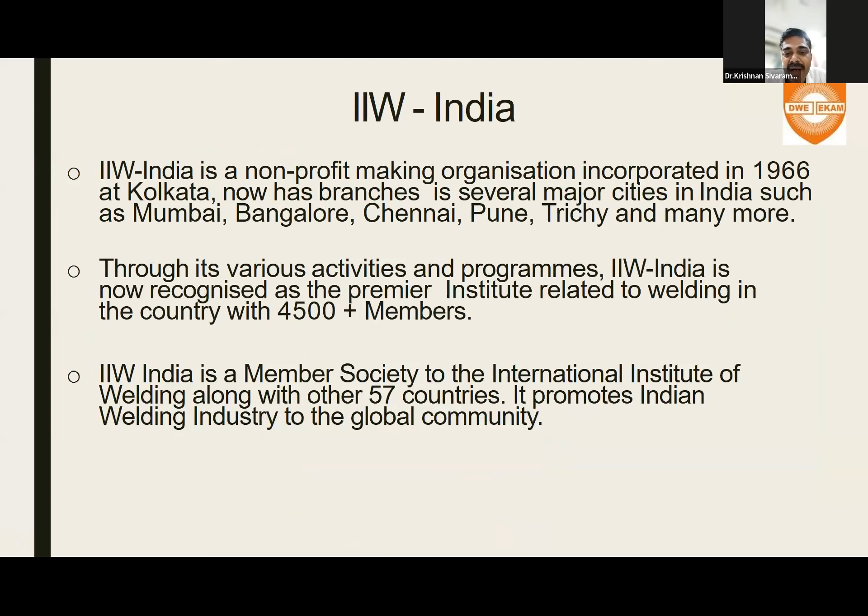So the basic objective is to assist human resource development in welding in India, and to foster R&D in welding, the technology diffusion to industry and the individuals. So a lot of activities are being done to promote health and safety in welding, and we also ensure that international standards of quality are being deployed in the Indian fabrication industry.

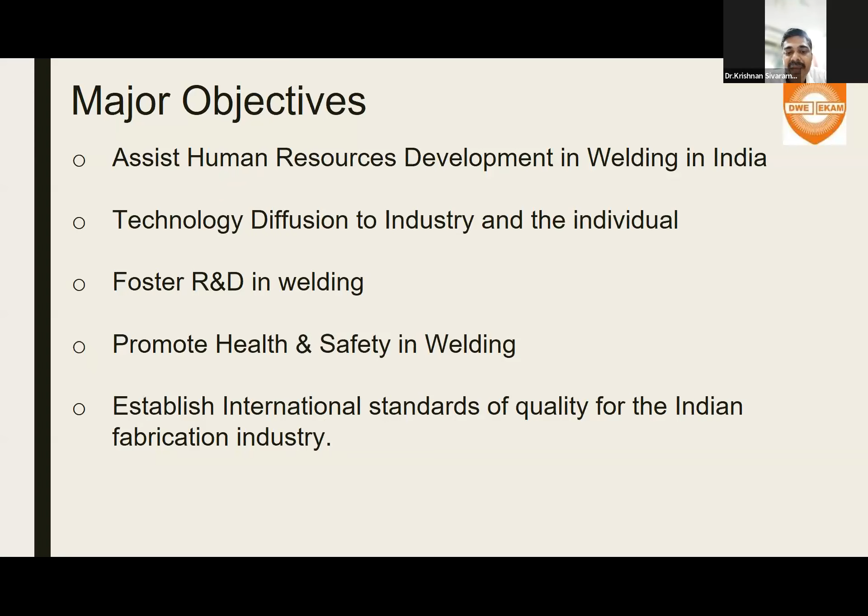So we at IIW conduct a lot of technical meetings, workshops, industry-oriented training programs at various branch levels. So as far as Mumbai branch is concerned, we conduct a lot of workshops, and this Weld Tech Talk is a perfect example where we get speakers all across the globe, and even the participants are from various countries. We get participants from almost 25 to 30 countries to attend this.

And we also run a lot of refresher courses related to welding and quality. And the IIW also publishes the Indian Welding Journal, which is done quarterly in collaboration with the American Welding Society. Next image.

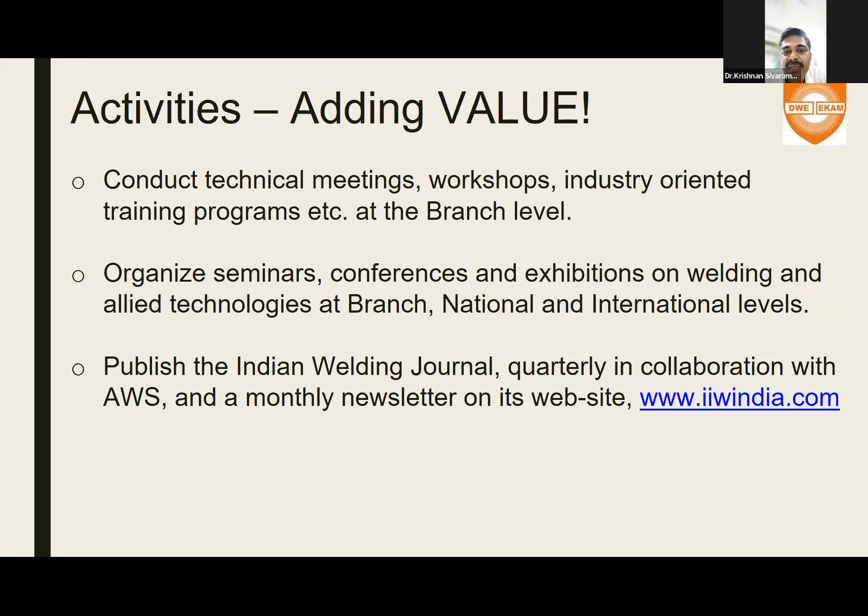IIW also does a lot of welding certifications under ANB for examination and qualification of welding personnel like International Welding Engineer, welding technologist, International Welding Specialist, welding practitioner. And those who are interested can be in touch with us so that we can guide you to the right person at the head office.

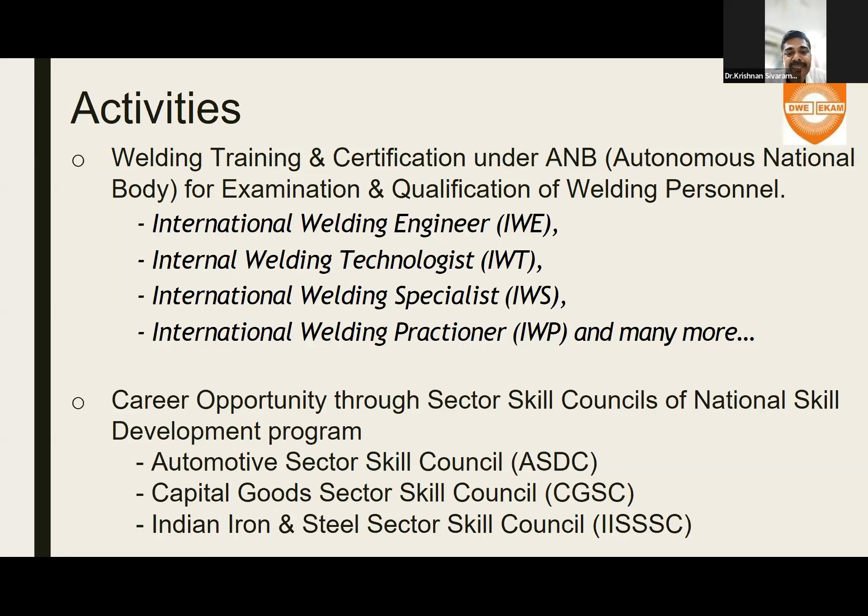And we also have association with various national skill development authorities and programs like Automotive Sector Skill Council, Capital Goods Sector Council, Indian Iron and Steel Sector Council. So as I already told, we have the Indian Welding Journal, and we conduct a lot of branch and national level technical programs and seminars. So in January, we are going to have an International Welding Conference. This time it is being done in Bangalore, along with IMTEX, with an exhibition.

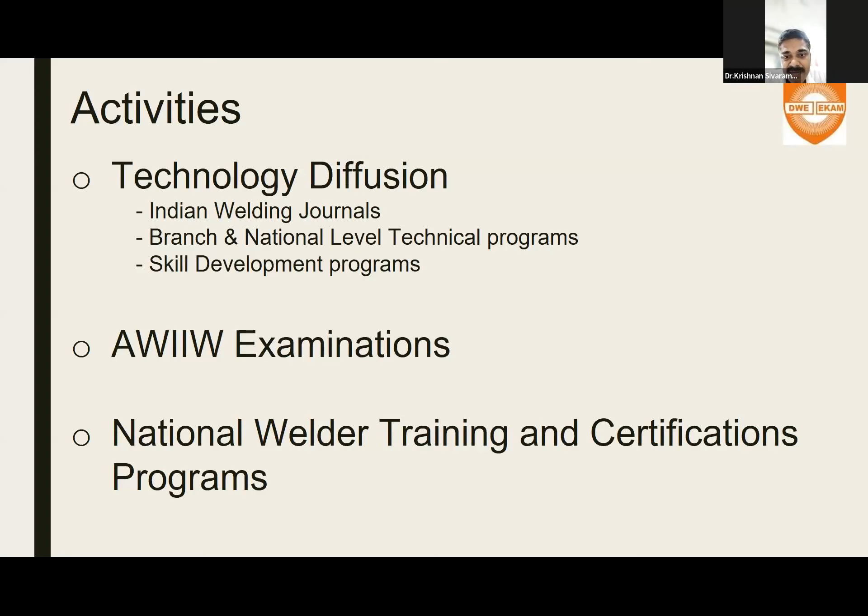And at the branch level, in November, we are going to have a competition for the best welders. And IIW also conducts at national level the best welding engineer competition, which will be rolled out soon. So we request all of you who are interested to participate.

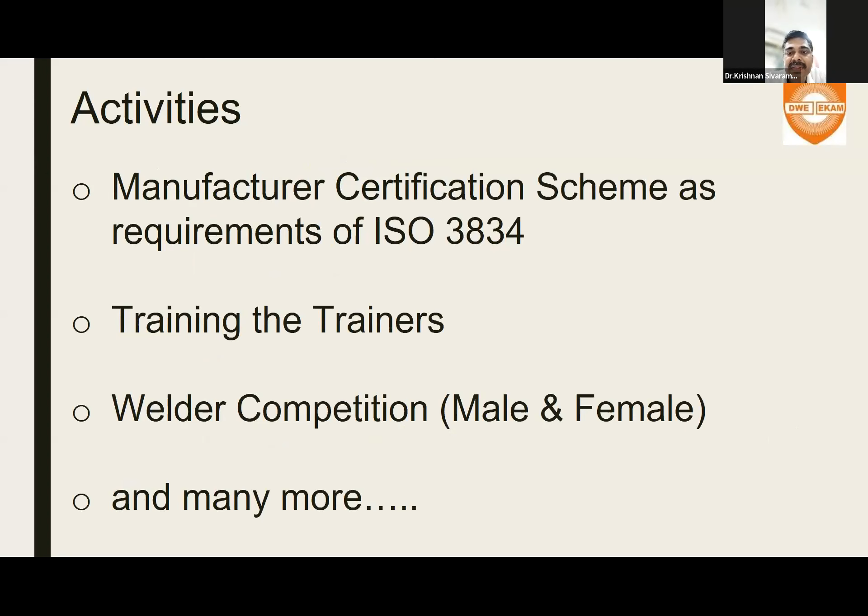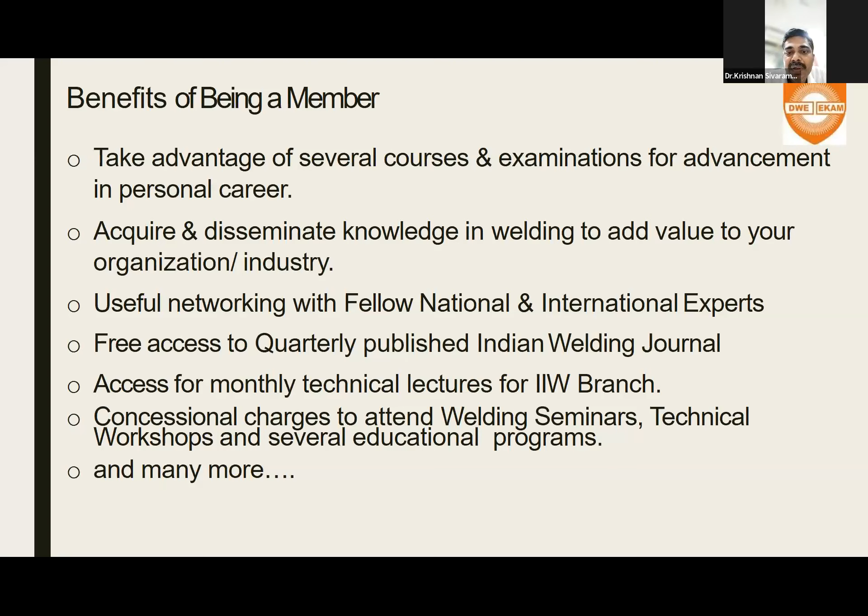So all of you who are not members are welcome. You can be a member of the IIW. There are certain criteria, and the membership has been made online now. So being a member, you have a lot of advantages; you can be part of all these initiatives which IIW is offering. We have a variety of memberships like associate member, associate professional member, and even student membership is available, and you can even be a life member. So those who are interested, please be in touch with us.

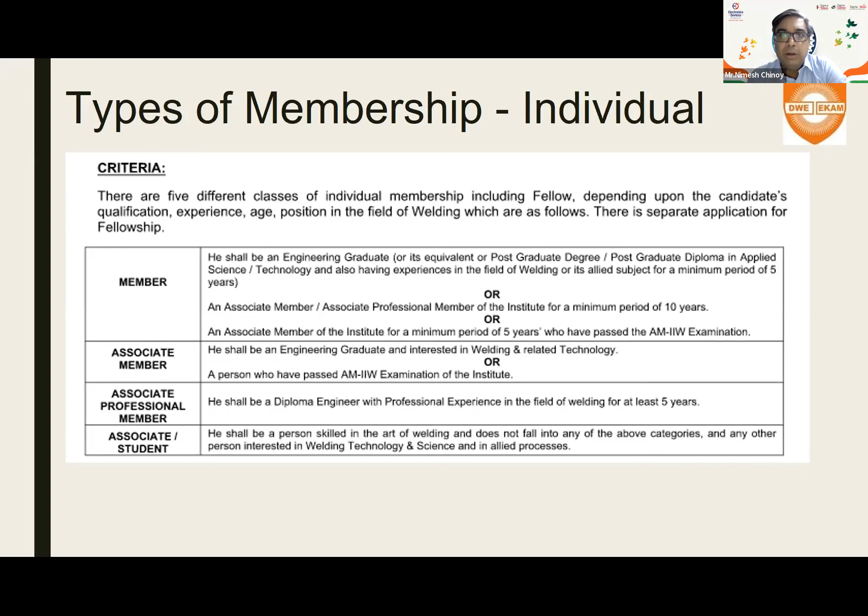Also, just to highlight, if you come from a university or an institute, you can connect with us for a student chapter where your students can take advantage of many of these programs on welding awareness. And we do a one-to-one connect, and we also explore industrial exhibitions and things like that for them, where the students can go to industries, see what the work is that a welding engineer or a welder does, and they get a lot of exposure. So if you are part of an institute or a university, please get in touch with us to start a student chapter within your institute.

So these are details of the various membership fees. The membership is quite light, and I believe it is now online. So you can go to the IIW India webpage and fill up the form there itself. And we really do encourage people to become part of and support this initiative.

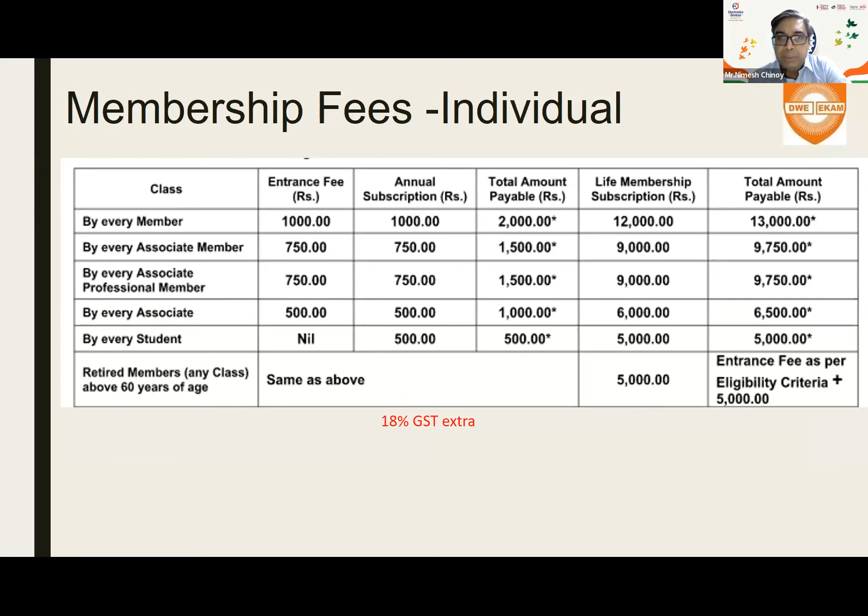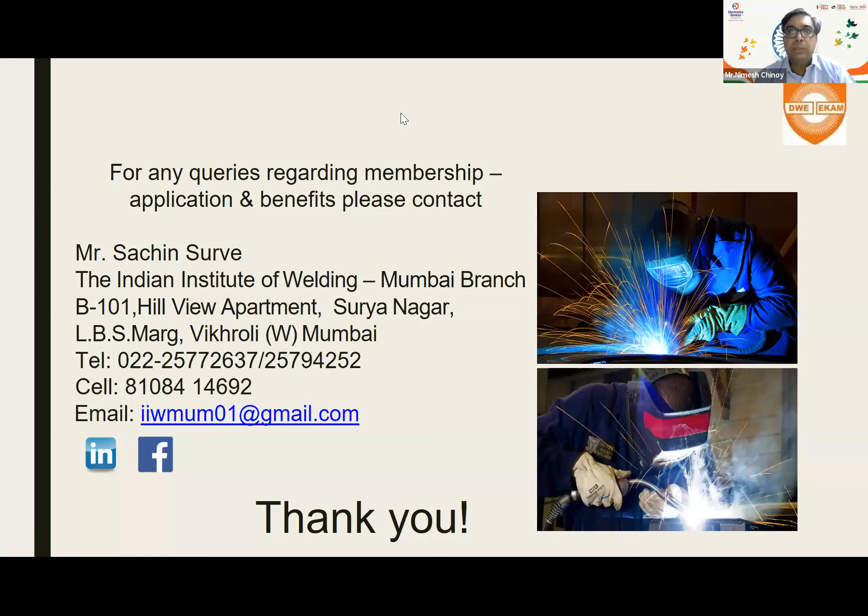Right? Yeah. Thank you, Dr. Krishnan. I'll stop share here. Yeah. And it's 5:08. I'll take another 3 to 5 minutes to introduce SigmaWeld. Yeah, and we've got more than 110 people, Mr. Omar. So we'll start off in the next 5 minutes. The stage will be all yours.

So just briefly and quickly, I'll try to introduce our company. Give me a second to share the screen.

Is this visible? Yes. Yes, Nimesh. All right. Yes, so very quickly, a little bit about me.

My name is Nimesh Chinoy. I'm the Director Technical at SigmaWeld. I have a double degree from Royal Melbourne Institute of Technology in Australia, and I have done my PGDM in Family Managed Business from SPJ Institute of Management and Research in India. I have 20 plus years of application engineering in welding and induction heating. I have authored and presented more than 100 technical papers on welding, induction heating, and IoT for Industry 4.0 at both national and international conferences.

I've been awarded the best technical paper at the National Welding Meet held in Cochin, and our paper on aerospace welding was selected for the Welding in the World magazine. I'm also the honorary secretary of the Association of Welding Product Manufacturers in India. I've recently also become a member of the BIS committee responsible for electric welding equipment, which is ETD 21. I am also the industrial corporate member representative at the Central Council for Indian Institute of Welding and on the core committee of welding for CII.

Our topic for today is about the best practice guidelines for welding and repair of P91 material. I'll start with the outlines, the topics we are going to cover: the development of P91 steel, metallurgical properties of P91 steel, physical properties related to welding, advantages of grade P91 over the conventional chromium moly steels, the preheat requirements, the filler materials we should use during welding, general welding requirements, dissimilar metal welding, post-weld cooling. This is post-weld cooling, not heating, and we'll speak more about this. The post-weld heat treatment guidelines, weld repair of P91 material, and we'll share 3 case studies about P91 material.

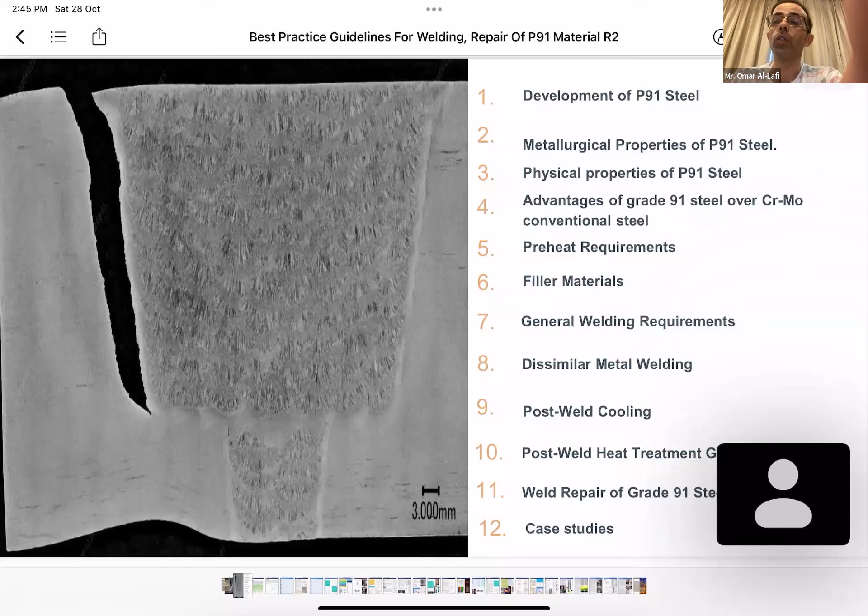The development of the steel as an introduction. This grade of P91 was developed by Oak Ridge National Laboratory in Tennessee, USA. The results of extensive studies done for this material attracted the attention of designers because of its higher strength and creep resistance, and the lesser weight required for manufacturing pipes and fittings. So the first use of this material was in 1983. This is when P91 material gained its acceptance through code case 1943 in ASME Section I.

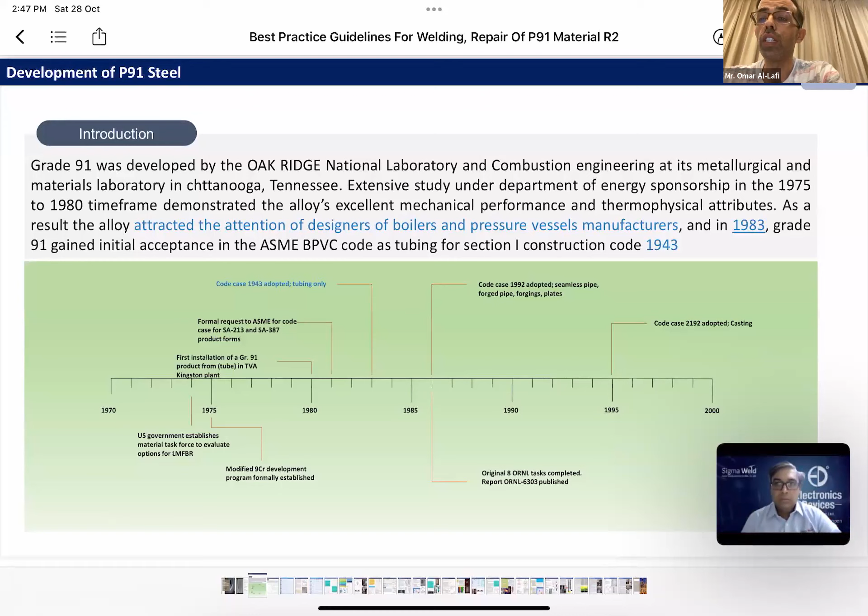This is the timeline for developing the material, the studies done for this material, and the code cases for accepting P91 material in ASME Section I. The first code case was, as I said, in 1983. And after that, many code cases were accepted for forging and casting as well.

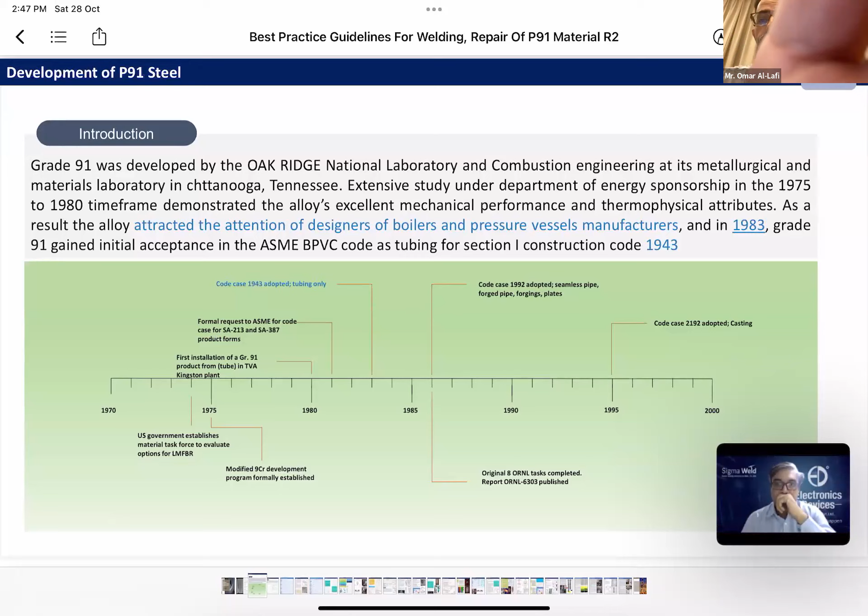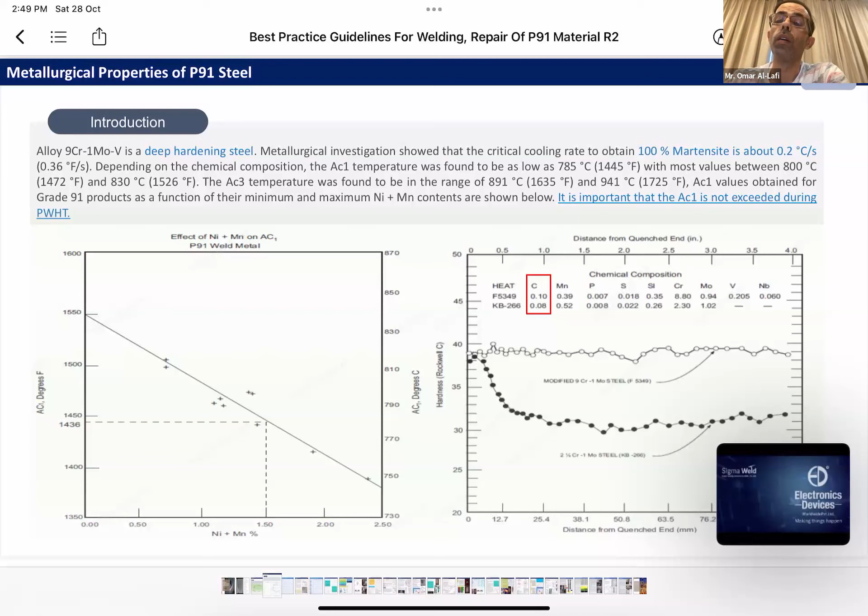We'll speak more about this, but this graph on the left side shows how nickel and manganese content can lower the transformation temperature, or AC1 temperature. In ASME, we have a limit of 1% for both nickel and manganese in the material, in order not to exceed this temperature during PWHT. This table shows the chemical composition of different grades of 9 chrome 1 moly steels in different specifications and code cases.

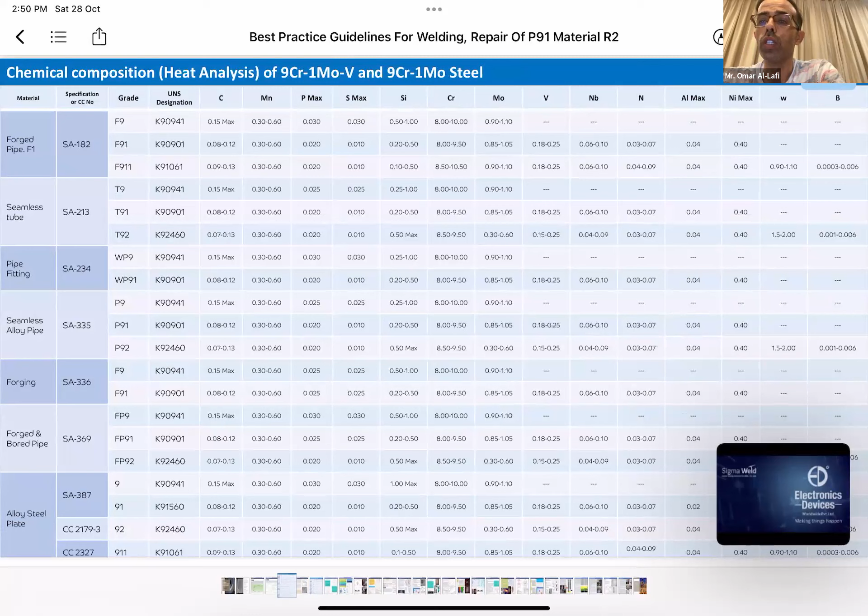And we'll go to martensitic formation. As I said, what gives the strength for this material is the martensitic transformation upon cooling. So during cooling from austenitization temperature to room temperature, the martensite structure will form, and that structure is what is required in P91 material. So P91 material is not just another low alloy steel. It's a different grade and should be treated as such.

So the tempered martensite has a better creep resistance and a better creep rupture strength for this material. It is important, again, to be sure that the tempering temperature does not exceed the lower transformation temperature AC1, which can affect the creep rupture strength of the material.

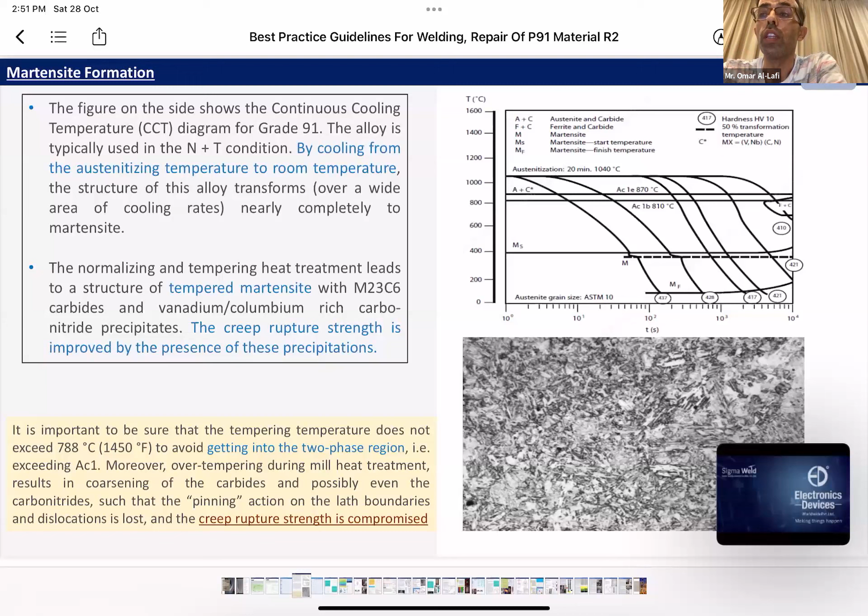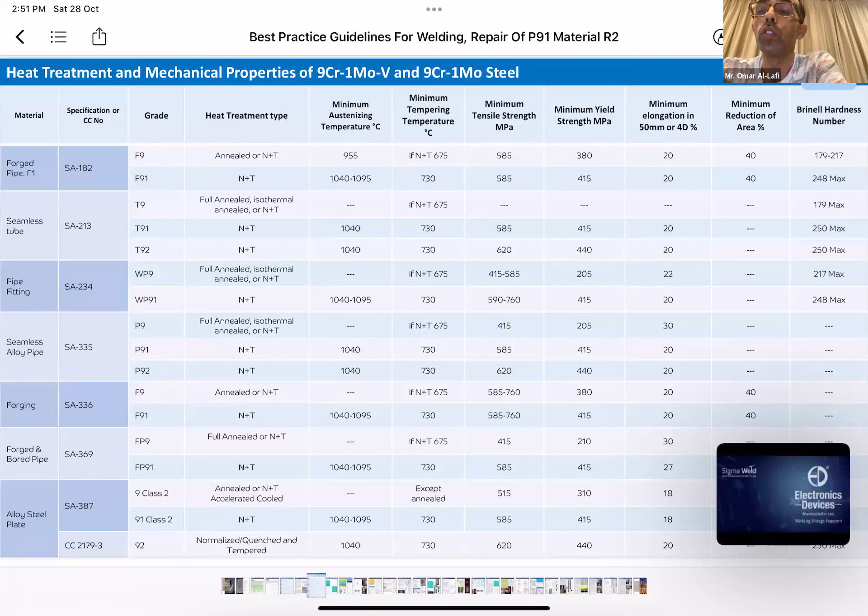This table shows the heat treatment for manufacturing different fittings and pipings, and forging as well in different specifications, and minimum tempering temperatures required for these materials.

The physical properties - I will speak about two properties here: the coefficient of thermal expansion. The higher the coefficient of thermal expansion, the higher the distortion susceptibility, because when you have high thermal expansion, the possibility of expanding during welding is more, and that will create more stresses and make it susceptible to distort during welding.

As we see in the graph, P91 material has a lower thermal expansion coefficient than P22 and austenitic stainless steel. Whereas the other physical property, thermal conductivity, higher thermal conductivity is better in preventing distortion. P91 is lesser than P22, but it's better than austenitic stainless steel 304H grade.

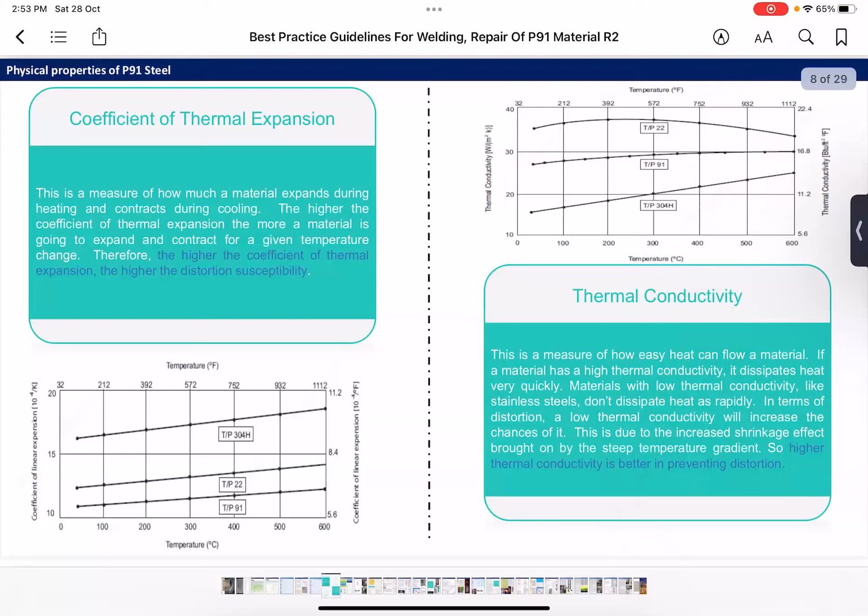So the advantages or the differences between P91 as compared to P22: it has superior performance at elevated temperature, higher strength, better creep resistance, lesser weight, and lower coefficient of thermal expansion.

And in the photos below, we see the difference in weight and the difference in wall thickness. You can save up to 65% of the weight when using P91 material, and the difference in wall thickness is around 50%.

This is a big thing. So lesser weight meaning lower cost - that's one of the things that attracted designers for using this material. This is very important during construction when you have lesser weight: lesser supports, lesser welding consumables. Everything is less, and it'll save cost.

So for welding variables between P22 and P91, preheat for both is required. PWHT, sometimes for some thicknesses can be waived, but for P91 it is always required. Normalizing and tempering after cold work is always required for P91. Post-bake or post-heating is recommended for P91, optional especially when you use low hydrogen designation electrodes, and sometimes it is used for P22 as well.

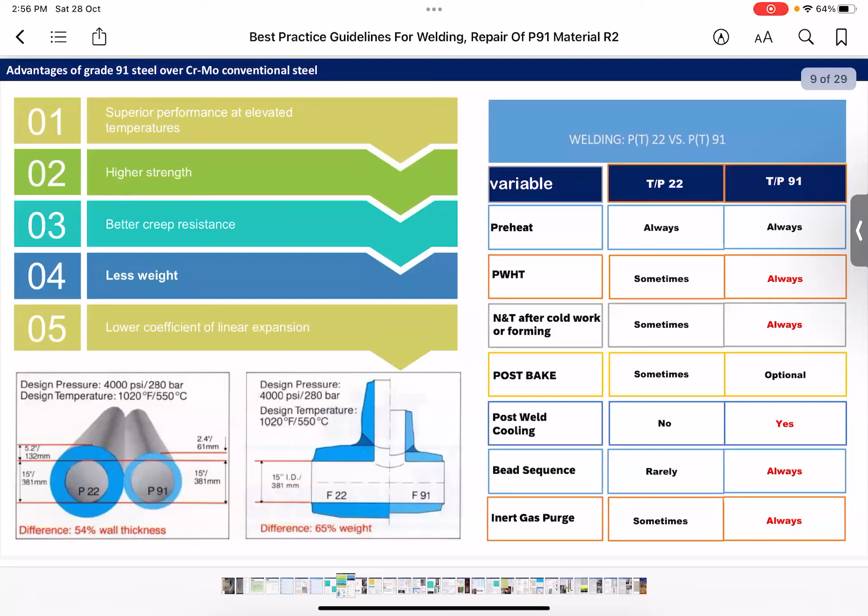For post-weld cooling, it is not required in P22, but it is very important for P91 in order to achieve the martensitic structure. The bead sequence is always required - we have to follow the bead sequence from the bevel side to the center of the bevel, and inert gas purging is always required, not only for the root pass but also the hot pass as well, which we'll speak about in the upcoming slides.

Preheat requirements: the risk here is hydrogen-induced cracking. This can be controlled by these factors: the stresses in the joint or the tensile restraints, and the susceptible microstructure. We know that P91 has a microstructure that can be susceptible to hydrogen-induced cracking if improperly controlled.

These two things cannot be controlled by welding. What we can control by welding is the hydrogen diffusion in the thickness of the steel. This hydrogen can be picked up from liquids on the pipe, moisture in the atmosphere, or the filler material. For these reasons, we should use low hydrogen designation electrodes, and we should keep our preheat temperature between 150 to 250.

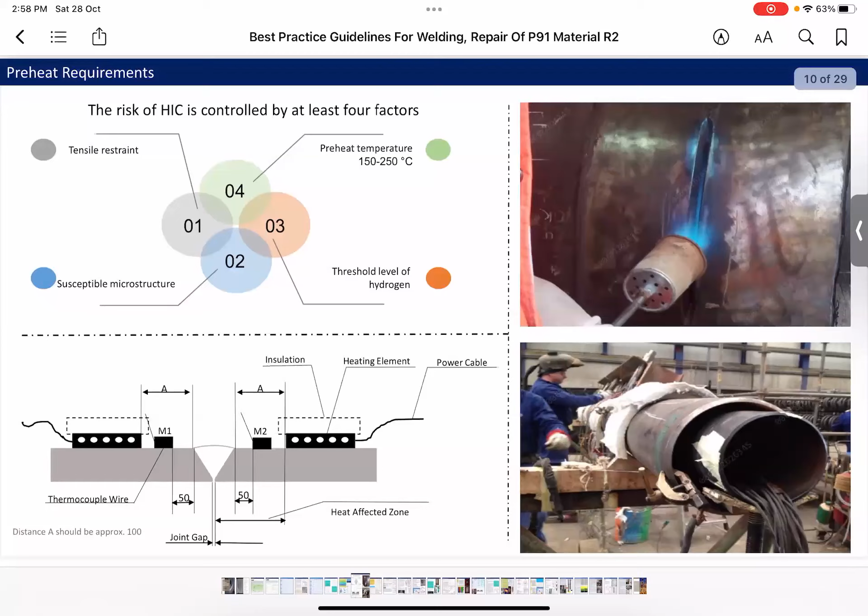Filler materials - I have 3 points here. The first one is matching filler wire. We should always use matching filler wire, but I know this is not always possible. Sometimes we might have dissimilar weld joints. We all know dissimilar weld joints are not recommended, but in many cases they cannot be avoided.

For the chemical composition of the filler wire, I should bring your attention that the MTC should always be verified for each filler wire to be used in the welding.

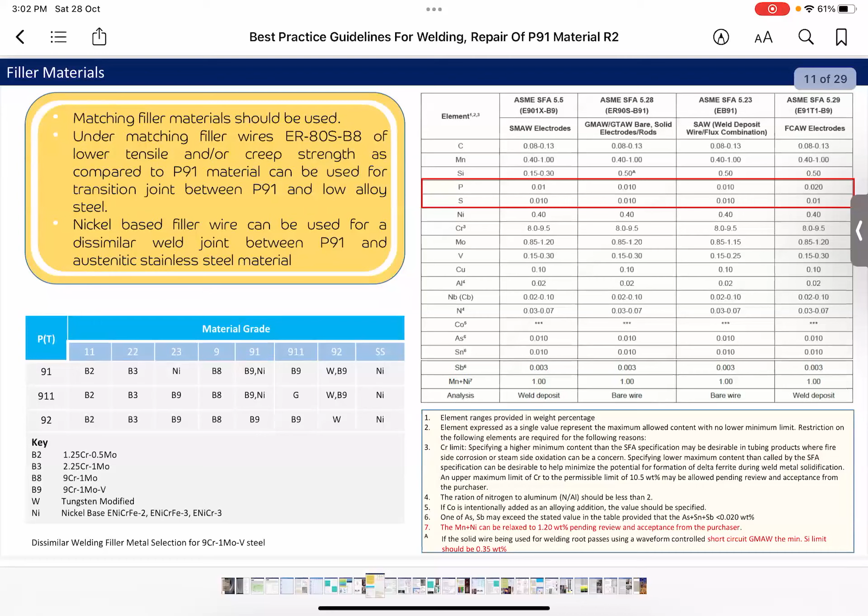Also for short circuit GMAW, the silicon limit should be 0.35 or higher. This is because if it is less, it will affect the wetting action of the filler wire and creates many problems of lack of wall fusion. This is a common issue, a common problem in GMAW short circuit, and it is addressed by ASME Section 9, where welders using this method should be qualified not only by NDT but by mechanical test.

The interpass temperature: the purpose of interpass is to permit a reasonable welding productivity rate, but the temperature should be of a reasonable upper limit to prevent excessively slow cooling.

The interpass temperature also should be sufficiently low to prevent issues with hot cracking. As I said, if it's too high, it can melt those elements like phosphorus or sulfur inside the steel and can create hot cracking if the content is too high.

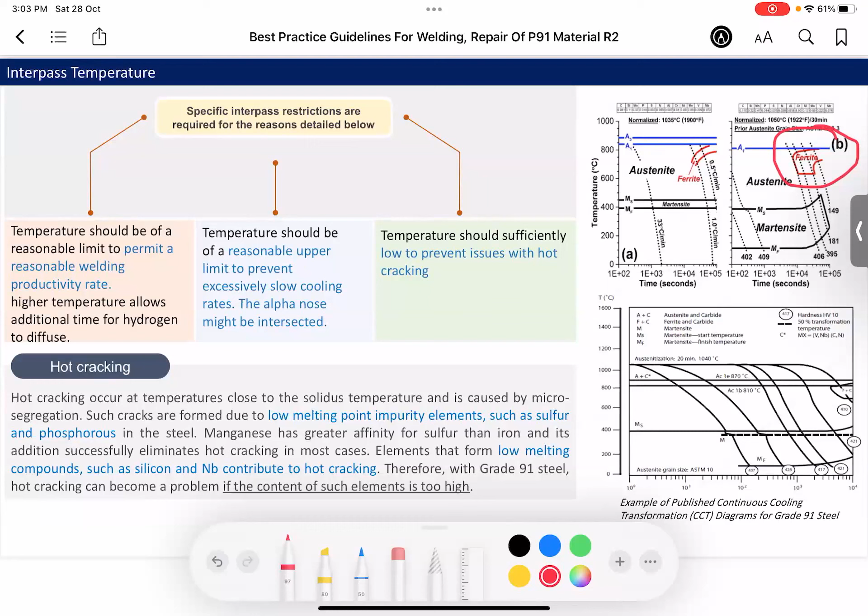This is again a reminder that we should always verify the MTC and do PMI for the filler material.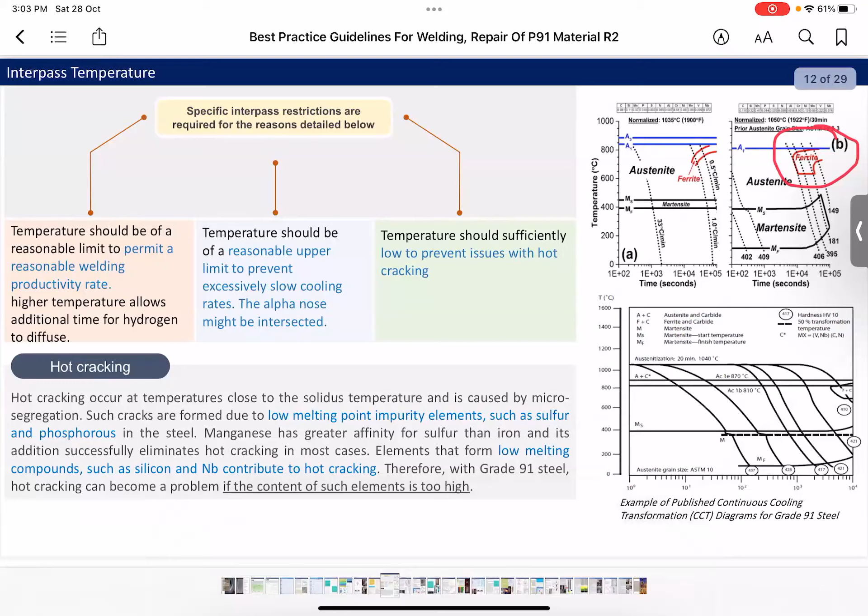General welding requirements: all SMAW electrodes should be certified to H4 designation. The back purging and shielding gases for GTAW is 100% welding grade argon, and the back purging shall be kept until at least the root pass and one hot pass have been deposited.

The maximum heat input should be 1.2 kJ/mm. This is why we restrict using a small filler wire of 2.5 or 3.2 mm for the root, to reduce the heat input and reduce the width and extent of the heat affected zone inside the base metal.

The interruption of welding should be avoided until at least 10 mm of weld metal or 25-30% of the groove thickness has been deposited. If this interruption occurs, it should be tested. Preheat should be restored and maintained.

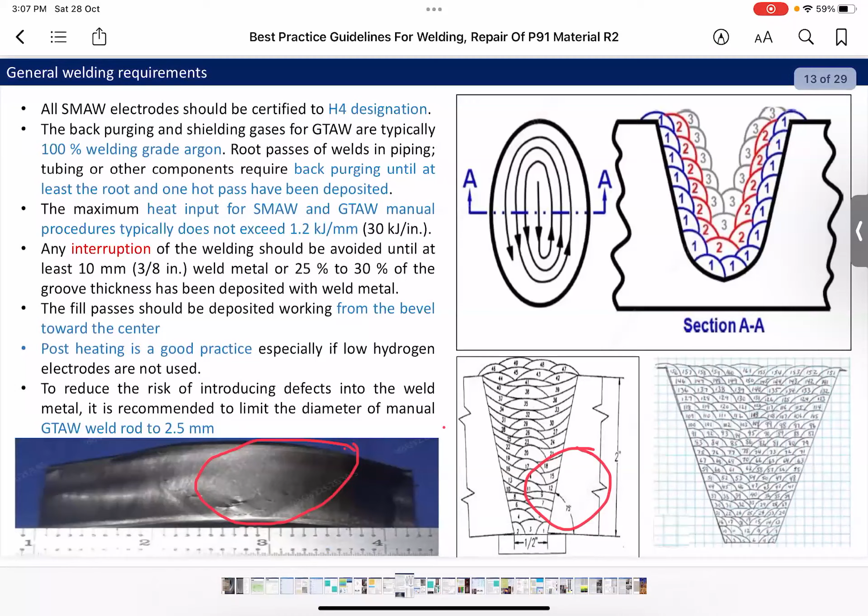For similar weld joints, we see that one of the important things we should do is the step bevel. This step bevel is very important, not only in similar welds but also for thick components. We should also use this step bevel.

The reason is that the susceptible area for cracking is the heat affected zone. This is because of the fine grain structure, or the soft area, that can have type 4 cracking in P91 material. So the location where the crack can initiate is within the heat affected zone.

If it's going to propagate, it will propagate through the heat affected zone. This area here is the base metal, which has better creep resistance, so it will stop the propagation. But this distance should be at least 10 mm or higher. We have common cases where the distance of the step bevel was less than 10 mm and the crack initiated. We can see in this photo how the crack propagated through this small step bevel of less than 10 mm, and the propagation stopped at the edge of the 10 mm bevel. So we can see the effect of this step bevel, how it can prevent the propagation of the crack.

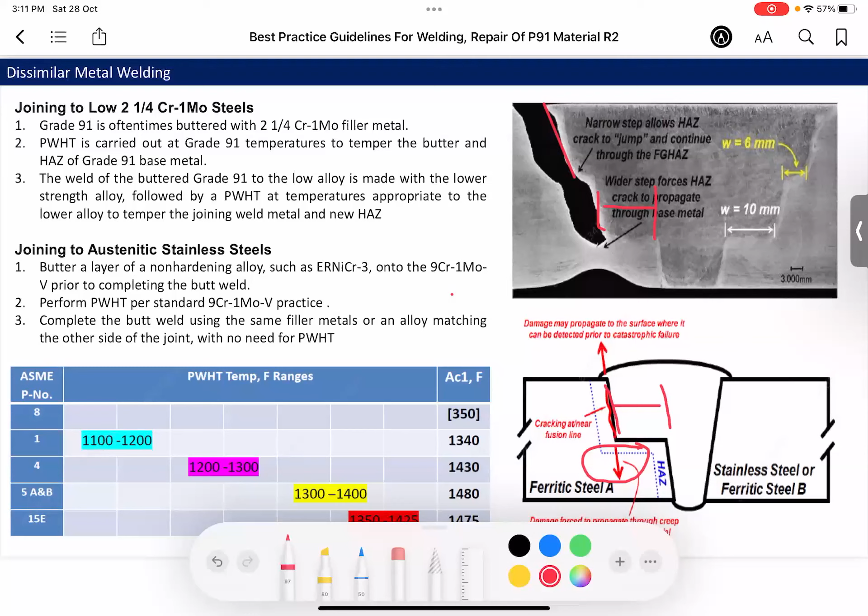For stainless steel, the weld will be done using Inconel or ERNiCr-3 on the 9Cr-1Mo-V prior to completing the butt weld joint, and then the buttering will be post-weld heat treated according to the practice for P91 material, and then complete the butt weld using the same filler wire without PWHT.

So why do we do this? Because as you see in the table, the lower critical temperature or AC1 temperature for P22 or P11 can be lower than the PWHT temperature for P91 material, and this can create a problem. We know that we should not exceed this temperature. So this is one of the reasons why we should take care when welding P91 to a different grade, and this is why we use an undermatching filler wire for welding this dissimilar joint configuration.

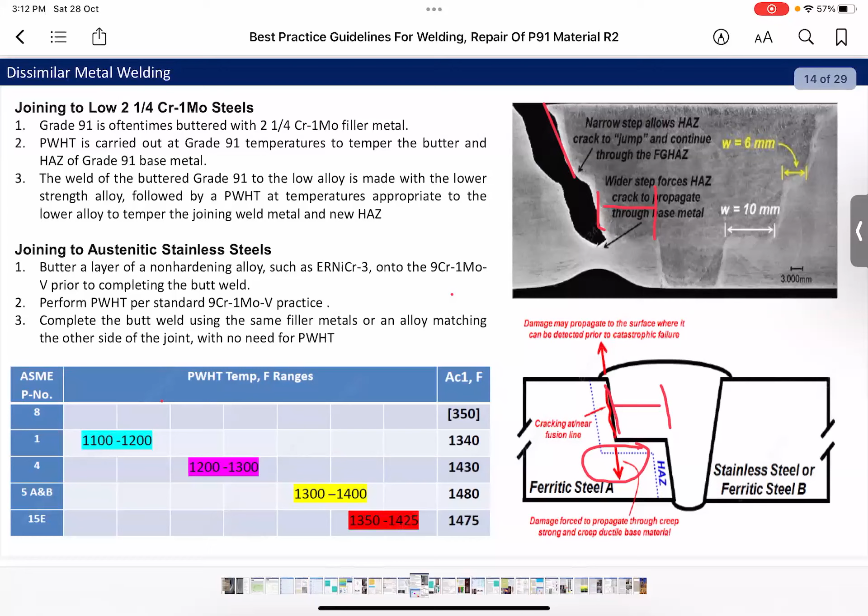This is an example of poorly controlled welding during dissimilar welding. We see in this colored photo, the depth of the heat affected zone is almost 70 to 80% of the wall thickness of the tube. This created a problem, and the crack initiated from there and resulted in a rupture in the joint. This is due to high heat input during welding.

In such cases, we should consider the size of the welding consumable or filler wire used, or we should have a skilled welder who can control the welding to avoid excessively slow travel speed during welding, to reduce the heat input. So increasing the heat input can result in a high thickness or greater extent of the heat affected zone.

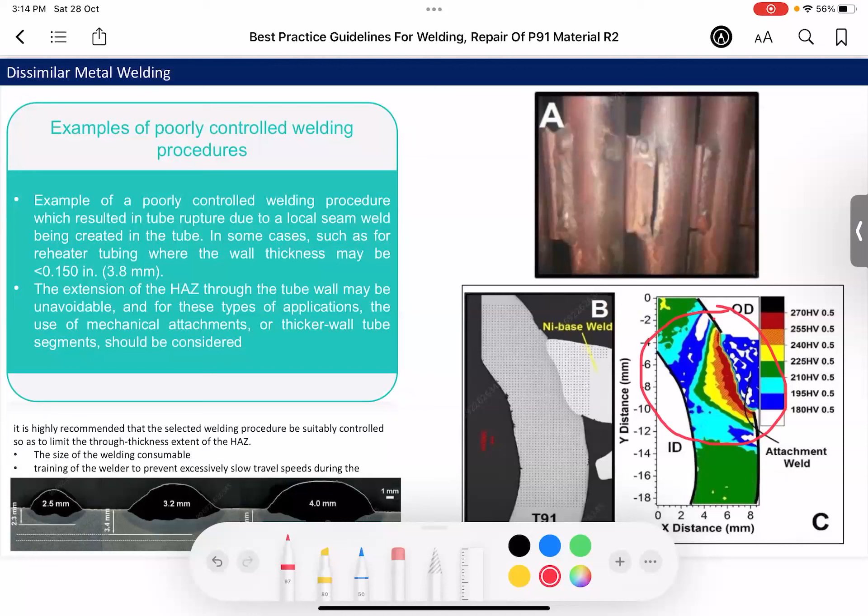Post-weld cooling: as we said, martensitic formation will be done after we cool the weld. This post-weld cooling is not required for P11 or P22, only for P91 material, so the structure will transform to full martensite after cooling to ambient temperature. As we see here, this is the transformation temperature. MS is the start point for transformation to martensite, and MF is the finish point for martensitic transformation. It should be noted that MF is just around 100 degrees Celsius.

So in order to ensure that we're having a full martensitic structure in P91 material, the temperature should be brought down to below 100 degrees, to room ambient temperature. But I should emphasize that after cooling, it should be sent directly to PWHT. There should be no time between bringing the temperature down to ambient temperature and PWHT. The moment we reach room temperature, we should go directly for PWHT, in part because this can create stress corrosion cracking if it is exposed to moisture or sulfur species.

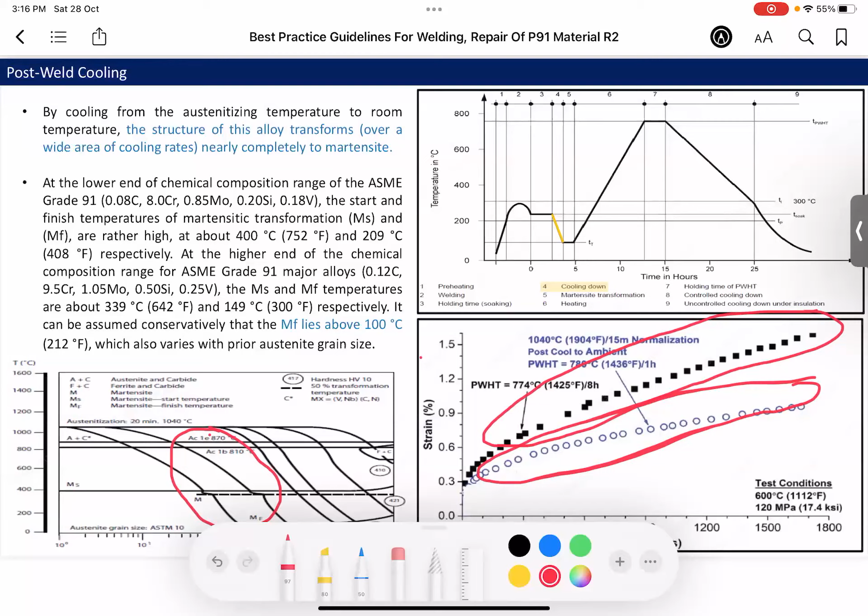For PWHT, why are we doing it? It's not because of the base metal, it's the weld metal. The as-welded P91 material has a high hardness of 50 Rockwell C, so it has to be tempered.

As you see in this paragraph, the hardness of the as-welded, untempered martensite is in the range of 400 to 450, whereas after heat treatment it goes down to 250 to 300. So without tempering, it may be prone to stress corrosion cracking prior to PWHT, and delay or omission of PWHT might result in intergranular cracking if exposed to moisture, and transgranular cracking if exposed to sulfur species. Intercritical heating between AC1 and AC3 promotes type IV cracking, or cracking in the heat affected zone.

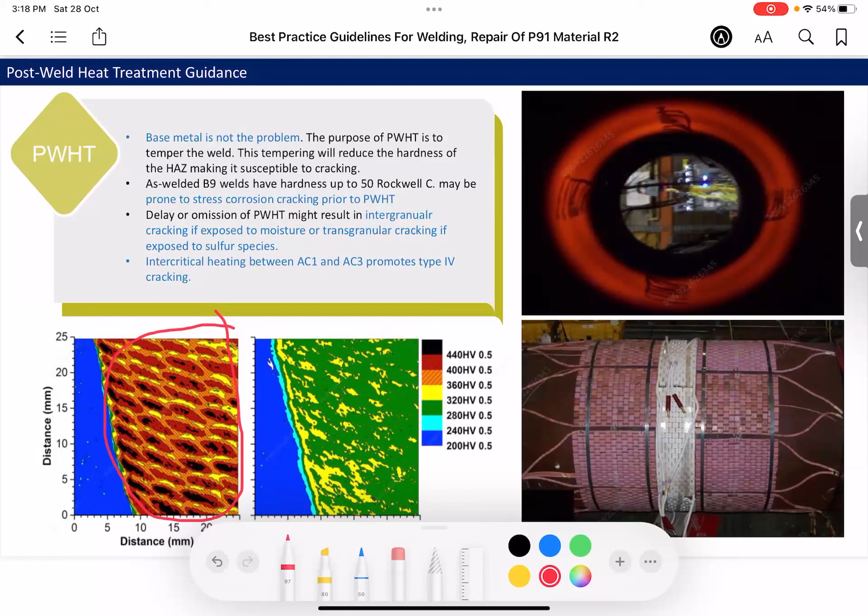In here, I would like to say that we should have proper thermocouple distribution under the heating pads and from both sides, from the OD side and from the ID side as well. And all these points should be witnessed during PWHT.

So this illustration is for PWHT and the distribution of thermocouple and heating element, and we can see that this weld has resulted in cracking because the Mn and Ni elements were not verified, and it resulted in type 4 cracking in the weld. So we should always verify the content of nickel and manganese prior to welding.

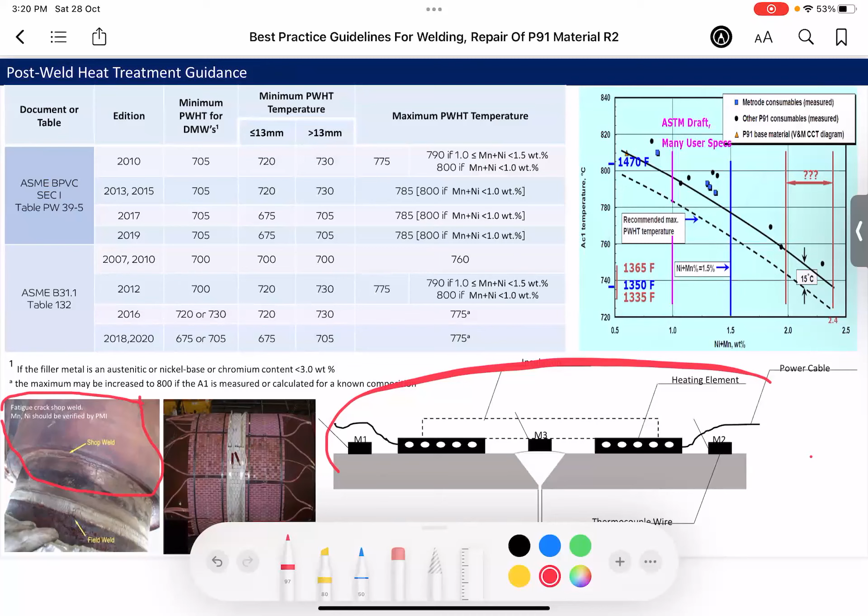So the PWHT procedure should be reviewed carefully. This temperature, AC1 temperature, should be calculated for a known composition. And the chart on the right side shows how the AC1 temperature can change as a function of nickel and manganese content in the steel. This is the minimum and maximum PWHT temperature according to ASME Section I and ASME B31.1.

For post-weld heat treatment, as I said before, the AC1 of the weld must not be exceeded. This is very important. Why? Because it will not have a martensitic structure, it will have a ferritic structure, a different structure in the steel that might be prone to cracking during service.

Premature failure in P91 material is most of the time attributed to improper PWHT. So it is a good practice to determine PWHT holding time and PWHT temperature on testing of the welding procedure qualification, and that welding procedure qualification should be strictly followed.

So the type 4 cracking, I spoke about type 4 cracking. The cracking of the weld joint is usually classified according to the position of the crack. So what do we mean by type 4 cracking? Type 1 and type 2 are within the weld metal, type 3 in the coarse grain area, and type 4 is in the soft or fine grain area, as shown here. This is where the hardness sharply drops, making it susceptible to cracking, or it will affect its creep strength and creep resistance during service.

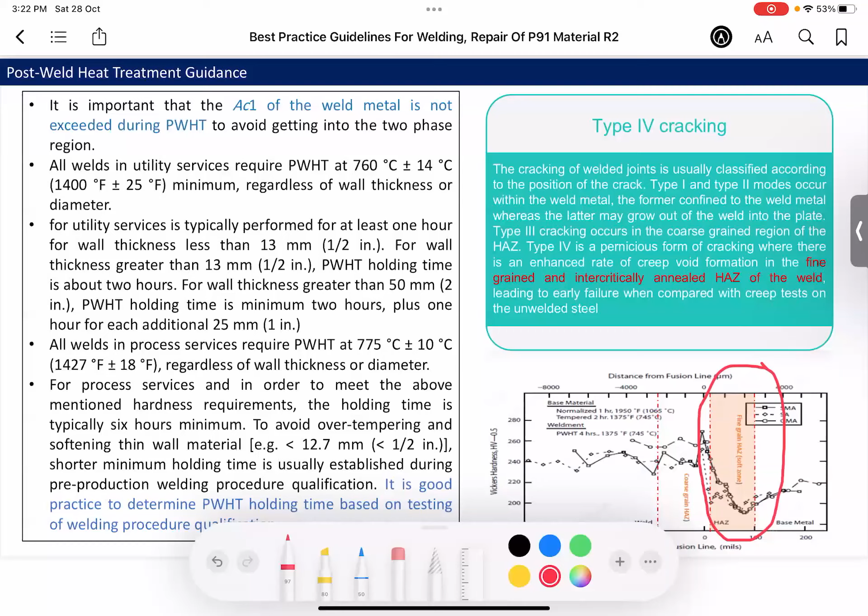So these are the steps that should be verified, carefully monitored and cross-checked before and during the PWHT. We should have inspectors. We should not rely on the contractor who's doing the PWHT. The first thing, maybe not mentioned here, I would like to say about the qualified vendors for PWHT. It is very important to ensure that the vendor doing PWHT has experience in post-weld heat treating of P91 material.

We are doing the heat treatment very close to the transformation temperature or AC1 temperature, and many factors can affect the accuracy of the post-weld heat treatment. If the temperature goes slightly above the specified temperature, we might exceed the lower critical temperature or AC1 temperature, resulting in cracks during service.

So the points are that the insulation and the pads must be properly sized, without gaps and without overlapping. At least one thermocouple installed under each stress relief heating pad. A single control thermocouple should not control multiple heaters, and multiple control zones for joints with dissimilar thickness transition. This is very important when you have dissimilar thickness between the two sides of the weld. We should have multiple thermocouples for controlling or monitoring the temperature there.

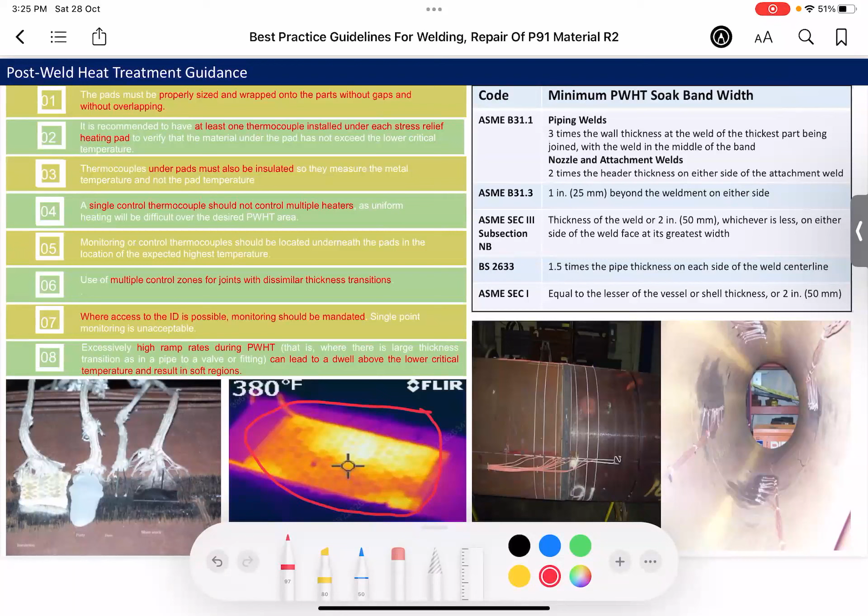And as you see here, the temperature gradient of the heating band, as shown in this IR image, we have different temperatures. So the location of the thermocouple should be under the highest expected temperature, and it should be insulated as shown here.

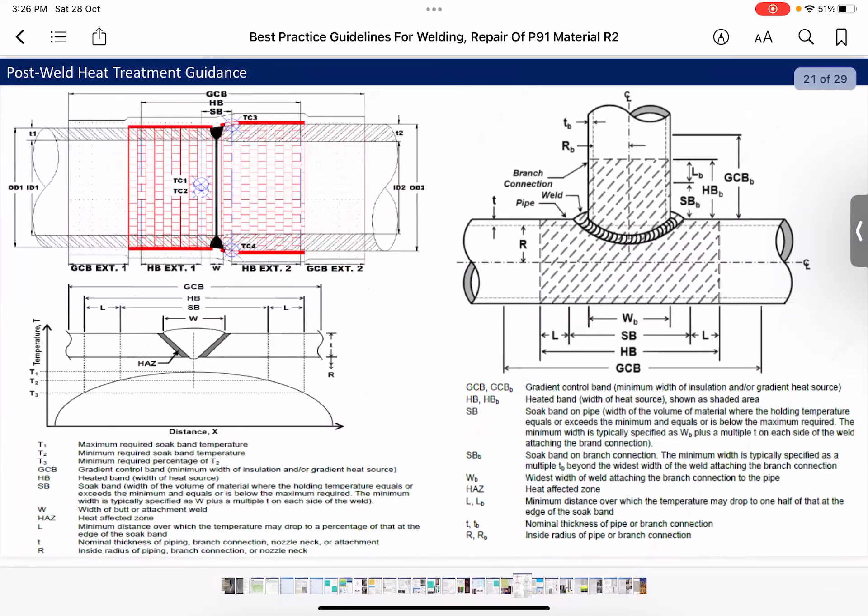So these are the charts for soak band, heat band, and gradient control band. As I said, these should be calculated and marked at site and shown in the PWHT procedure for this material.

So post-weld heat treatment for dissimilar welding. As I said earlier, the welding for dissimilar weld is sometimes done using different grade, non-matching filler wire, like under-matching filler wire or nickel-based filler wire.

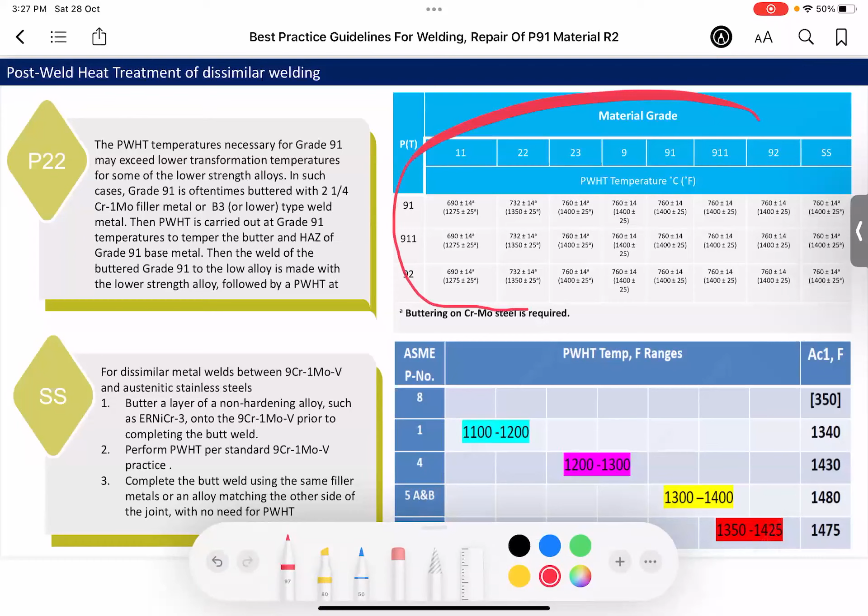So the PWHT, when P91 is joined to austenitic stainless steel, is done after the first buttering, and when joined to P22 material is also done after the first buttering layer, according to this PWHT temperature shown here. These are the temperatures for dissimilar weld joints.

For weld repair of grade P91 steel, as I said, this step bevel configuration is recommended not only for weld repair, but also for a new weld as well. So when we have a defect in the weld, this D is the depth of the excavation. We can excavate and ensure that the defect is fully removed by dye penetrant test. And after that, we should ensure that the corners of the bevel are rounded to avoid lack of fusion.

And the angle, as I said, should be 10 degree to 15 degree. This angle, if you see this chart here, it shows the comparison between different angles, and it shows that with 10 degree bevel angle, the time to failure, so the joints were tested with different bevel angles, the time to failure was double the time required for 25 or 35 degree bevel.

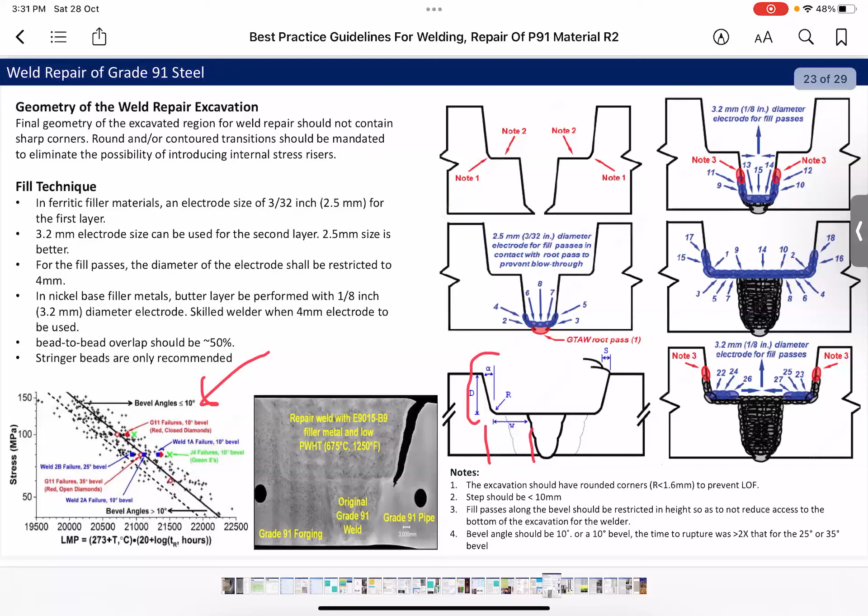The first case study is related to failure due to improper PWHT. This has happened in superheater tube. The tube failure occurred over a period of 2 years after 26,000 hours. The material was P91 tubing of 1.68 inch or 42 mm OD and 7.4 mm thickness.

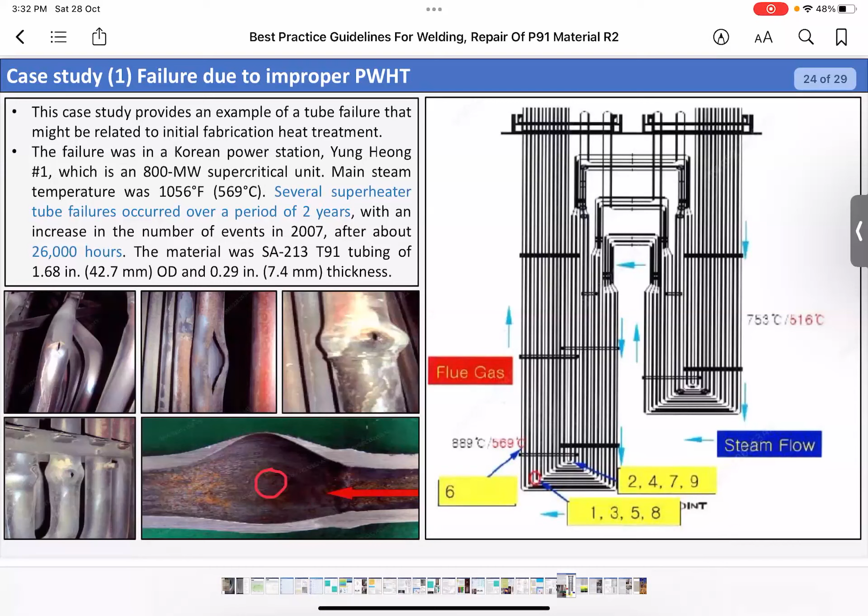So we see the fish mouth cracking in the tubes, and the hardness here was much lower than the hardness away from the weld. So this is a sign we had a soft grain, and this is evidence that the AC1 was exceeded during the weld. So as I said, the hardness in the section away from the weld from the failure side averaged between 188 to 220 Vickers hardness, but it was around 159 in the area of failure.

So the conclusion is the tubes were characterized as long-term overheating, possibly linked to oxide scale exfoliation, and the microstructure hardness of the area close to the weld provides evidence that the weld did not receive proper PWHT.

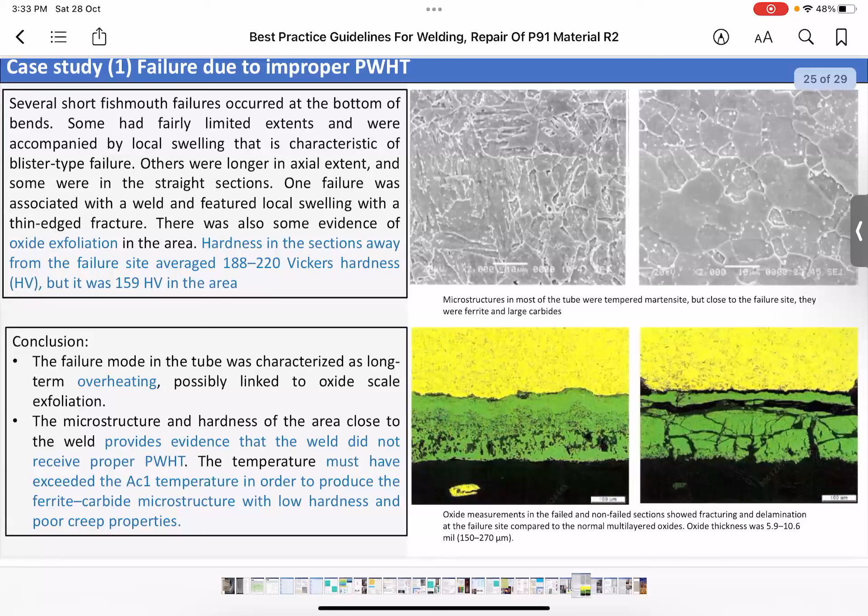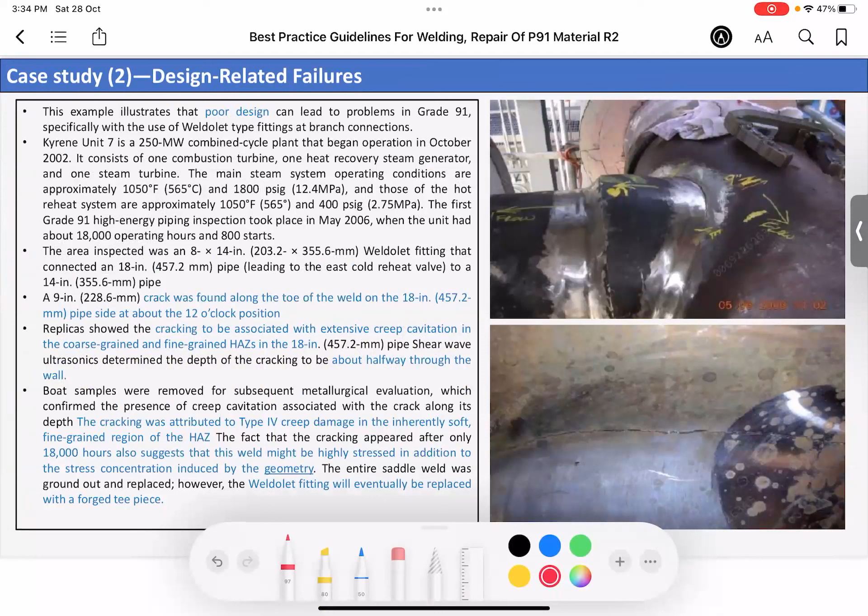The second case is related to improper design. So that was a poor design, weldolet, welded to 18-inch pipe, and the crack was in the 12 o'clock position. Cracking was associated with extensive creep cavitation in the coarse grain and fine grain area, as we'll see in the photos. And it was about halfway through the wall.

So the cracking was attributed to type 4 creep damage in the inherently soft fine-grained region of the heat-affected zone, and it occurred after 18,000 hours. So this also suggests that this weld might be highly stressed in addition to the stress concentration induced by the geometry. So the weldolet fitting was eventually replaced with a forged tee piece.

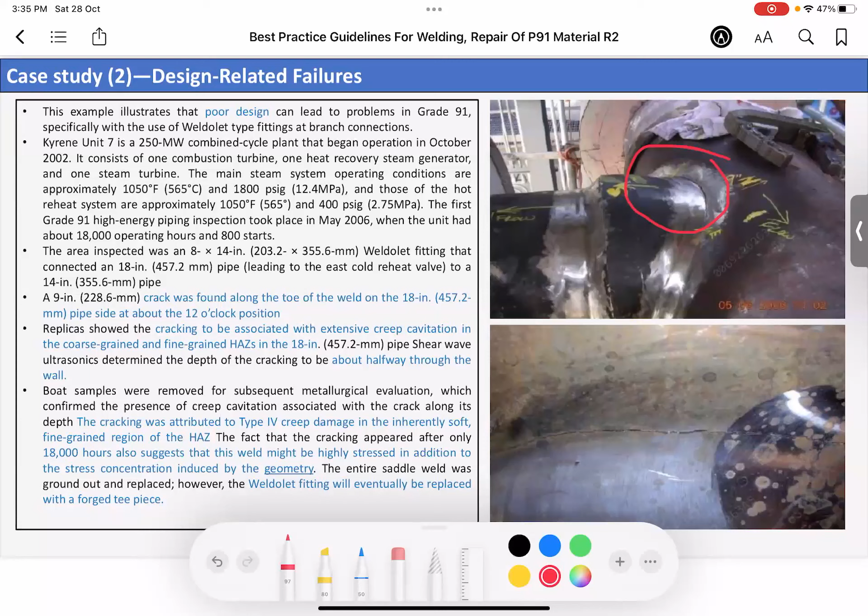As we see here, the creep voids in the microstructure, and the weldolet was concluded to be prone to early type 4 cracking because of the high stress concentration produced in the weld, and weldolets should be avoided in new construction. Forged tee should be used.

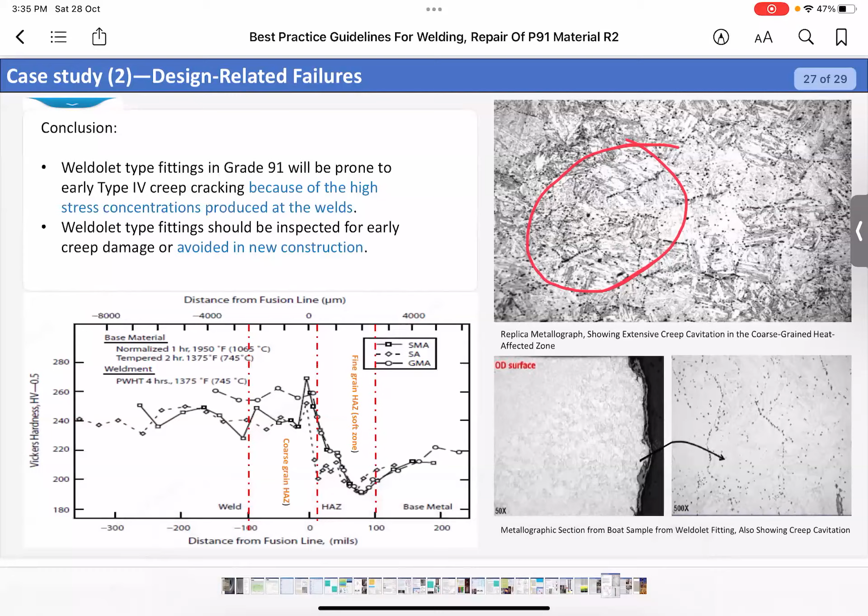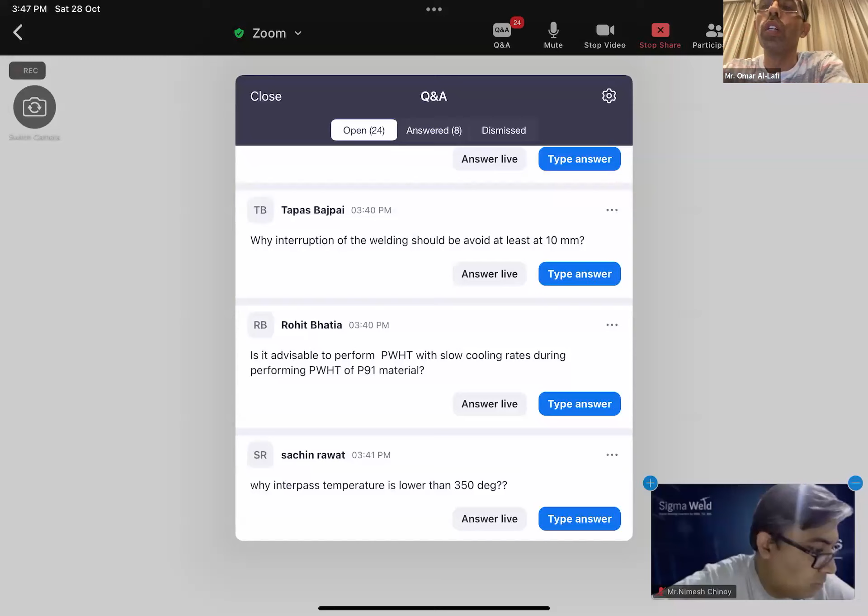Why should interruption of the welding be avoided at least at 10 mm? I'm not sure why, but interruption as a concept should be avoided for reasons I mentioned earlier, that interruption can result in cracking if the weld is exposed to moisture or to sulfur species during welding. And not only that, if you don't put sufficient weld, it won't have enough strength to hold. Because your hardness will be quite high for this weld, and if it's not sufficient to hold, say pipe to pipe, there is a possibility that it might crack. So sort of a restraint crack. Yes.

Is it advisable to perform PWHT with a slow cooling rate? PWHT heating and cooling rate should be slow. It should be limited to 100 degrees up to 400 degrees Celsius, and after that it should be reduced to 55 degrees per hour.

So what is the PWHT for SS316? Step cooling is mandatory for P91 welds, or post cooling? I'm not sure about step cooling or post cooling. No, by step cooling, I think they mean temper embrittlement. Yeah, correct. Which is not the general case with P91. It's not susceptible to temper embrittlement.

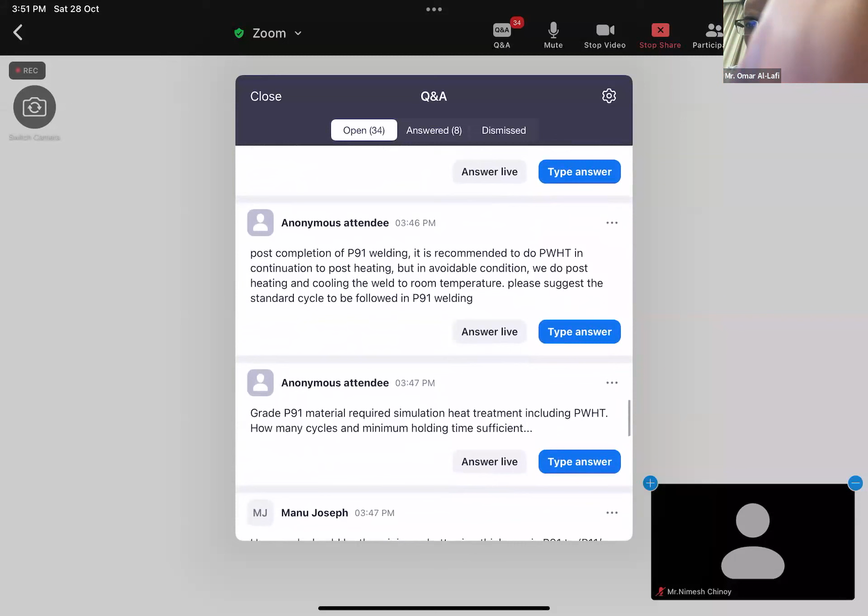Post completion of P91 welding, it is recommended to do PWHT in continuation to post heating, but in unavoidable conditions, we do post heating and cool the weld to room temperature. Suggest the standard cycle to be followed. The standard cycle for cooling is to cool it in still air to room temperature or to below 100 degrees Celsius. So we remove the heating pads, the insulation, we remove everything, and we let it cool in still air.

Does grade P91 material require simulation heat treatment, including PWHT? Yes. Simulation heat treatment is a good practice to be done. And also if you can have this simulated in the WPS qualification itself, that's fine. So you can have simulated heat treatment during the WPS qualification.

How much should be the minimum buttering thickness for P91 to P11 or P22? So it is only one layer. 3 mm buttering is sufficient for dissimilar welds. But as I said, P91 to P22 is a difficult dissimilar weld configuration, or it can be worse if welded to carbon steel. So this should be avoided. But one layer of welding is enough, heat treated according to the P91 requirement, and then welding using the low alloy steel filler wire.